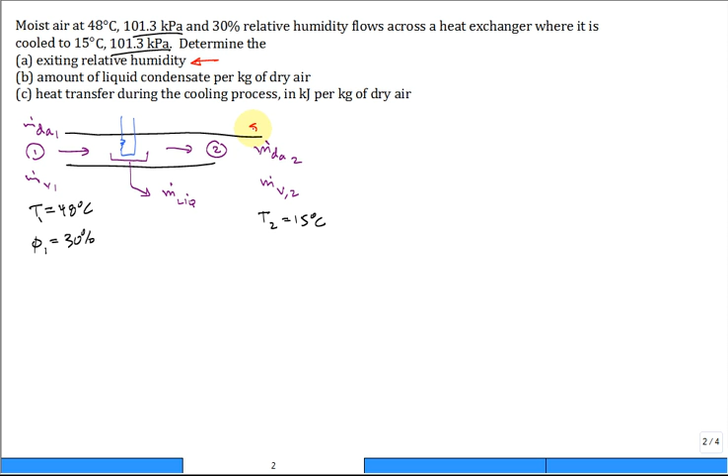So the first thing is if you get liquid condensation out, that means it's gotten to the dew point temperature and then below the dew point temperature. So you've taken some moisture out of the air, and so the answer to the first question you'll have to check, but it's probably coming out saturated air. And if it's saturated air, we expect that the relative humidity would be 100%. But we have to calculate that. We have to check it.

And so what we'll do is go ahead and write a balance. There's 3 balances, 2 mass balances. One is really trivial, it's for the dry air. The other one, a mass balance for the water. And then the other is an energy balance. So we do all of the balances for a control volume like this. So we have inlet 1, outlet 2, and possibly outlet of the mass flow for the liquid.

And then for heat transfer, for the energy balance, I'll go ahead and put it like this. Some Q dot, not in, but Q dot removed, because it's a cooling coil. It's taking heat out of that airstream.

So let's take a look at the first balance, for the dry air. It's really simple. The mass flow rate of dry air flowing in at 1 is equal to the mass flow rate of dry air flowing out at 2. Even though there's some water possibly condensing, the dry air flow rate's the same, and so we typically get rid of the subscripts and that's equal to a constant. It's just a constant.

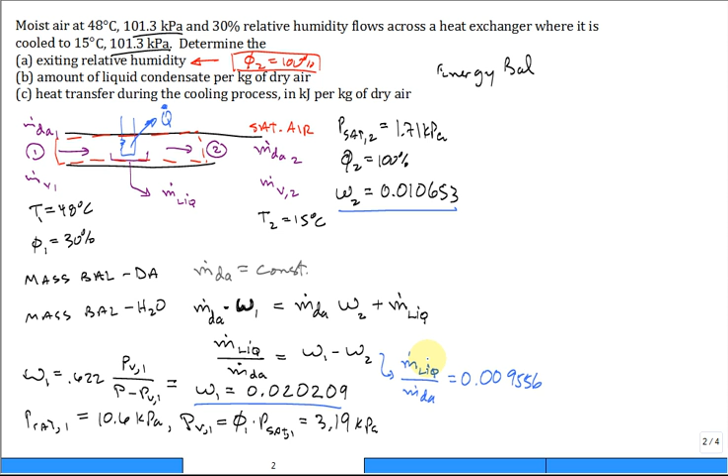So it's less, hence there was some condensate formed, and we can now calculate right down here that the mass flow rate of the liquid divided by the mass flow rate of the dry air is a difference between those two, and that's equal to 0.009556. So the exiting relative humidity we do confirm is 100% at saturated air, and the amount of liquid condensate per kilogram of dry air, the answer to part B is right here.

Now for part C, we need to do that energy balance. I don't know if I left enough room. Hopefully I did. We'll try and squeeze it in over here. And so for the energy balance, we have what's coming in with the mass flow, m dot of the dry air coming in times the enthalpy of the dry air coming in.

And then we have the mass flow rate of the vapor coming in times the enthalpy of the vapor, and I'm going to put H of G coming in for the enthalpy of the vapor coming in. So those two contributions, the dry air contribution and the vapor contribution of coming in with those two mass flow rates. Okay. Then we're going to have outs. Well, Q dot is an out, the way we've modeled it.

We also have mass flow rate of the liquid times some enthalpy of the liquid, and I'm going to put enthalpy as if it's saturated liquid, H of F, and it's going to go out at a temperature, and just like for our adiabatic saturation temperature, it goes out at the exit temperature T2. Okay, so if hot humid air comes in, cooler air goes out, the liquid goes out at the same cool air temperature going out. That makes sense.

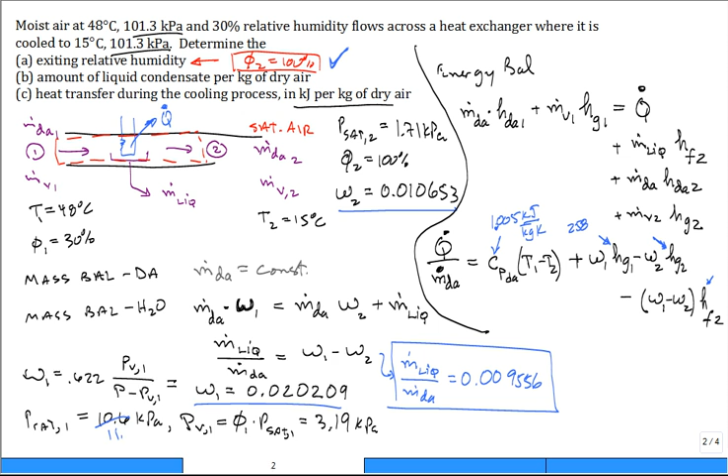And then you just multiply the relative humidity times the saturation pressure to get the actual vapor pressure. I like to always do it in 2 steps. Subtract to find the actual dry air partial pressure, and then compute the humidity ratio. So it's 0.0213, somewhere in there, 0.0213, okay?

And now, this is the enthalpy that's recommended to be used for the vapor coming in, H of G. And you can see how we look it up. It's the enthalpy, in this syntax, HV underscore T of water. So as a function of temperature, what is the saturated vapor's enthalpy?

You could also do it this way, and notice these two numbers are slightly different. Here, what are we doing? We're saying, give me the enthalpy as a function of pressure and temperature for water, and the pressure is the partial pressure, and the temperature is 48. So it does give you a slightly different answer, okay? But not much. It's good to 3 digits, but not the 4. But we'll use H of G, and that's what's recommended through the textbook.

Now, if you go out and say, okay, we're coming out at 15 degrees C at the outlet, and the pressure, humidity, we assume, and then we check, and it works out that it is saturated air. That's the saturation pressure. That's the actual vapor pressure. The partial pressure of dry air is much larger. The humidity ratio is much smaller. So you can see that this is a larger number, this is a smaller number. And you notice that there's much less difference.

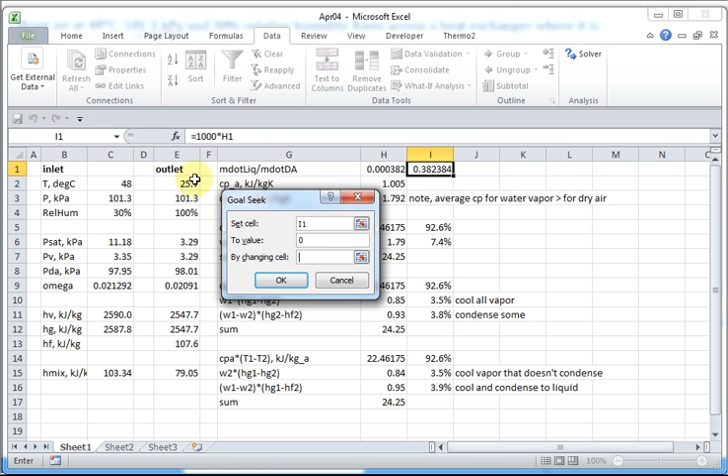0.1 is pretty small. By changing this number, 25.7, it won't change much, but let's see how much it changes. 25.9. So you really drove it to 0. So that's the dew point temperature, 25.9. And notice, there's no energy associated with condensing. It's almost all associated with cooling the dry air. 92.6% of the energy cooling is just to cool the dry air.

It's a lot cheaper to air condition buildings and homes in West Texas, where you don't have a lot of humidity issues, versus Houston, New Orleans, etc., where you have a lot of moisture. It takes a lot more energy to cool it. So there you go. Let's put this back to 15 degrees C.

There's one other thing I did in this Excel spreadsheet that I'll show you. You can get a number for the enthalpy of the mixture. This equation right here is just saying I'll take a specific heat, multiply it by the temperature, and that's a measure of the enthalpy of the dry air. And then we'll add to it the humidity ratio, omega, times the enthalpy of the vapor. And now I have an enthalpy of the mixture. By itself, it's not good, but if I get another enthalpy of the mixture, this one, similarly calculated, whoops.

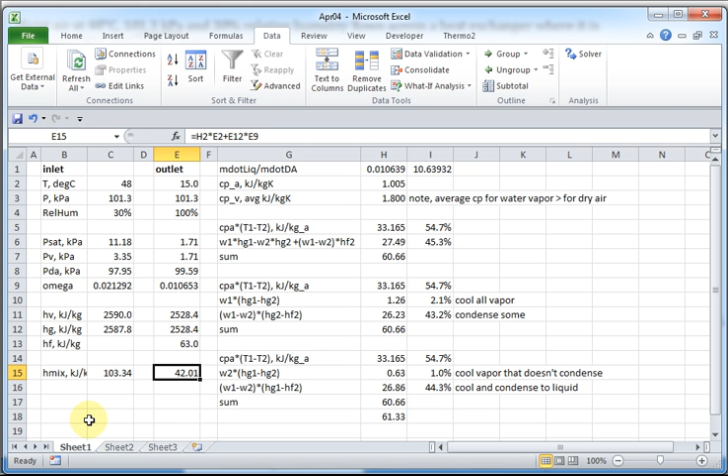So if we go back, we can wrap up that problem. What is it? You know what? I'm not going to wrap it up because I see that all my numbers were thrown off. Okay, so you'll have to just compare, fix it.

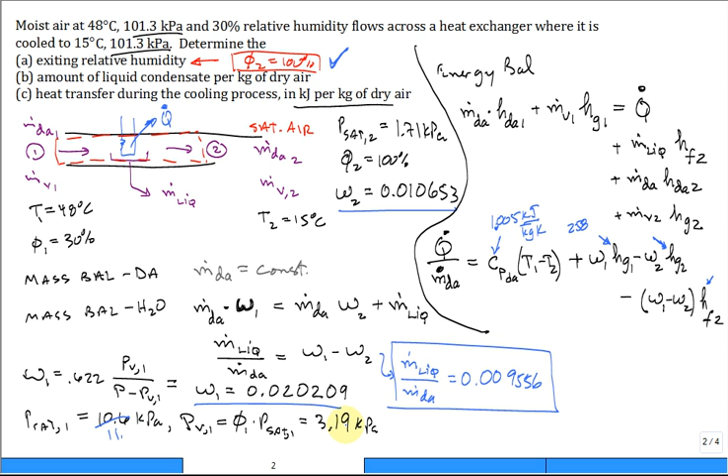But let's move now to what is the psychrometric chart. I often don't want to introduce the psychrometric chart to students too early, because then they just want to use the chart to solve all the problems. This chart has a lot of information. First of all, remember that we have knowledge of two humidities. We have relative humidity and humidity ratio.

This one gets more talk out in the literature, out in the newscast, etc. And probably you're more familiar with it coming into this class. But the engineers really like humidity ratio. We do a lot of calculations based on humidity ratio. And then we have some temperatures. We have the dry bulb temperature, the wet bulb temperature, the dew point temperature. So 2 humidities, 3 temperatures.

That's a lot of information already to try and put on one plot. But then we also have, and we didn't talk about it too much, the specific volume. This would be how many meters cubed per kilogram of dry air. If you're trying to size a duct, you'll need to know how many CFM, or cubic feet per minute, or how many cubic meters per minute of flow go through it. So it's a volumetric type of calculation. So often we need that specific volume as well.

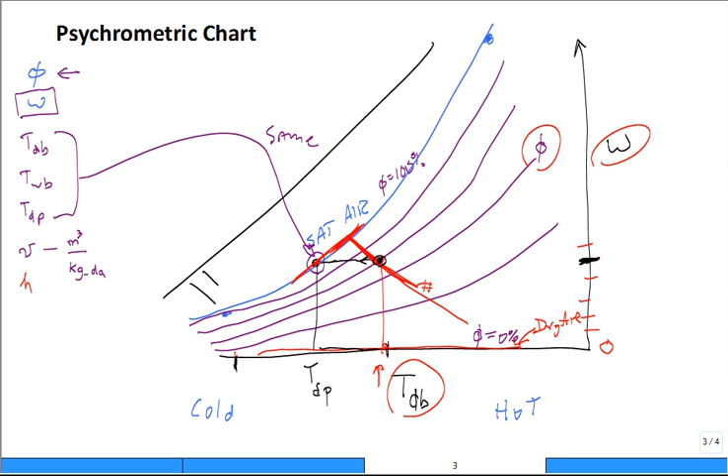Now up in here, I forgot to mention also, there's enthalpy of the mixture. Enthalpy of the mixture is like this, and they project down the lines, and for this class they are essentially the same slope as the wet bulb. They're coincident. Now they're slightly off in a good psychrometric chart, but we only have one or two days of the psychrometric chart and we're done. So these are lines of constant enthalpy. That's the mixture enthalpy: C sub P times the temperature plus omega times h of g. And that's the lines that are on the chart.

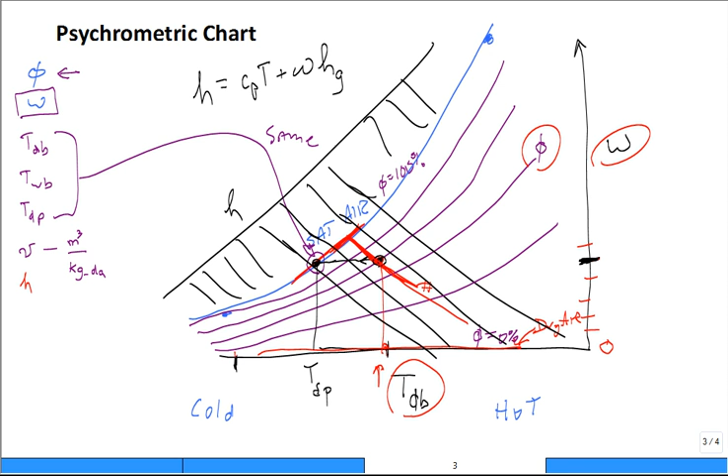So here you can get one of those charts right here. Let me not take off the top one because I got something written on it. There you go. And this is now the chart. It's a little overwhelming, but hopefully we broke it down. What's on the x-axis? It's the dry bulb temperature, in degrees C. What's on the y-axis? Don't look to the left, look to the right, and it's humidity ratio in kilograms of water per kilogram of dry air. And then find that line of 100% relative humidity for saturated air. It goes just like that, coming all the way down.

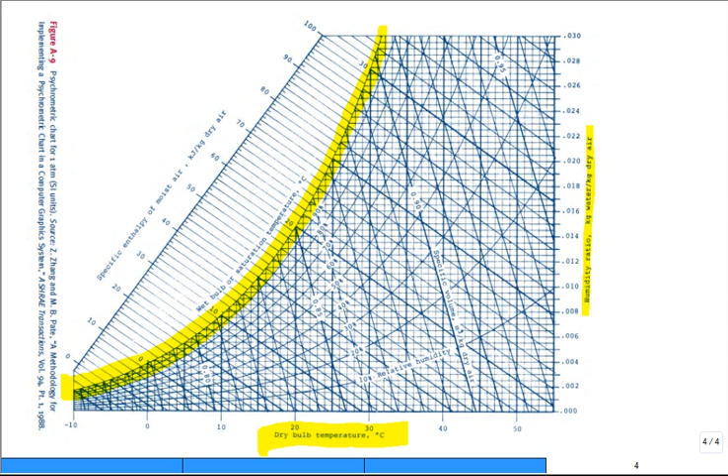And then find lines of other constant relative humidity. Maybe you pick one that is 50%. Here's a 50% relative humidity line, and it goes like that. Notice cold air cannot hold a lot of moisture. Warm air, hot air can hold a ton. So a 5-degree increase in temperature from here to here really greatly increases how much moisture the air can hold, how much omega can go up.

And then the lines of constant enthalpy, here's their specific enthalpy, so 40, 50, 60, and they get you the slope going and you project it off and down. So if you use it, you have to use a ruler. Straight edge, that's right. And then also they put these lines in here. Let's look at this one that hits at 20. This line right here is not a line of constant enthalpy, although it's the same slope. It's a line of constant wet bulb temperature, which is 20 degrees wet bulb.

So this line right here takes you a while to figure out what that is, because it's nice and thick, and this line is nice and thick. This one, oh, it's 10 degrees wet bulb. This one's 20 degrees wet bulb. This one was 15 degrees wet bulb. And then you can see, that's 11, this one's 10, 12, 13, 14, 15. And so you get used to reading it, the lines of constant wet bulb.

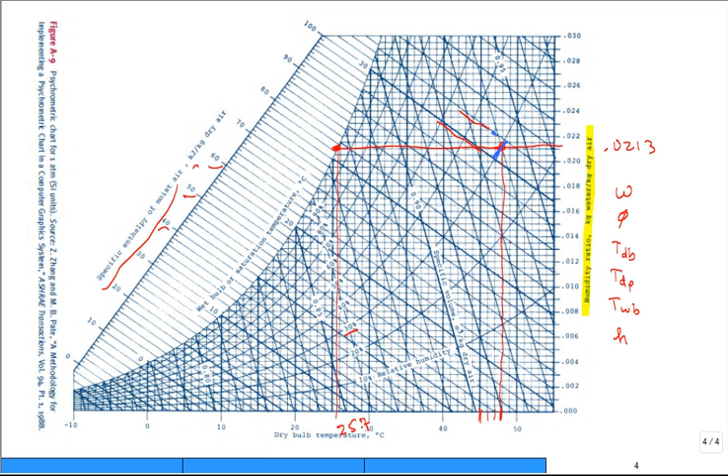So for each state, we should be able to get the omega, the phi, the temperature dry bulb, the temperature dew point, the temperature wet bulb, and you can also get enthalpy of the mixture. Okay, so the wet bulb is right between where the omega and the dry bulb temperature meets. Yeah, it looks like you have to interpolate this way between this line and that line. Okay. This line's 30, that line's 31, and it looks like it's around 30.8. So for the wet bulb, 30.8.

And now the other one, if you want, you can extrapolate this back and pick off a mixture enthalpy. And I would say it's around 104. The mixture enthalpy is maybe 103, 104 kilojoules per kilogram. Let's jump back to the Excel code to see what it came in at. 103 point something. So you can confirm these numbers. Let me jump back to the psychrometric chart.

Okay. Now, what happened was you started to cool it. And when it first came across the coil, it cooled a little bit, cooled a little bit, until, as it's flowing deeper across the coil, it finally reached a temperature about 25.7, and it still wanted to be cooled all the way to 15. It starts dewing out now, till you get to, here's 15 degrees. And this is 100% relative humidity. That's saturated, true? So it goes all the way to this point. So that's the path.

Like that. And at that point, the three temperatures are trivial, aren't they? Yeah, they're all the same. But you could read across and get omega. And so it looks like omega is around 0.0105. And let's jump back to the Excel and take a look. Omega 0.0106. Yeah, it's pretty good. And so we'll jump back over here.

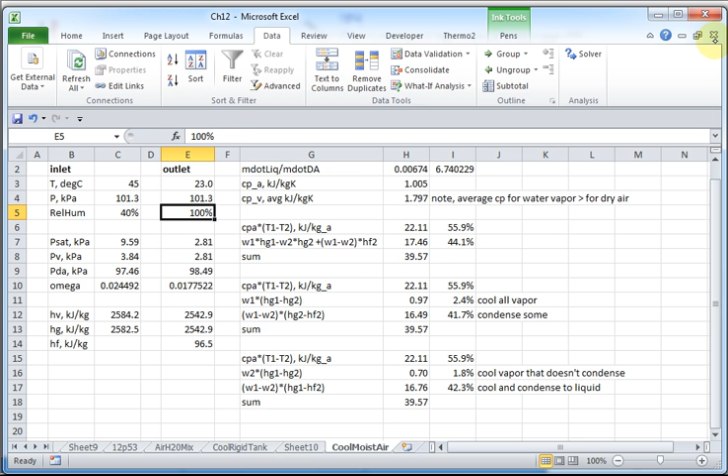And then also, you should be able to read off the enthalpy. What's the mixture enthalpy look like? Oh, I'd say around 42. 42. And if we jump back to the Excel code and take a look, its mixture enthalpy... whoops, I went to the wrong Excel code. I should close this other file. It's 42.01. In the ballpark. Or even do the calculations in the first place.

Once you get good at the chart, people don't want to let go of it. It's like, hey, this is so easy. All those tedious calculations. Oh, yeah. So students really love it. You have to pull them off and say, no, no, no. Do not use the psychrometric chart for this problem.

Now, the way that instructors can easily do that is they'll say something like, this chart right here is good at what pressure? Atmospheric pressure. They change the pressure to make up some ridiculous pressure. Oh, it's 0.8 atm. That shifts everything. The chart, if you use it as 1 atm, will be close, but it won't be exact. So there's the rub. That's how an instructor like myself would force a student to say, hey, no, you can't use the chart. That's only good for 1 atm.

Yeah. Okay, so the enthalpies look great. And if you wanted to, the specific volumes are right here. This line, you see how they're sloped? They're sloped that way, and they're very steep. So the specific volume here is 0.85, and then this is 0.90. And you just have to read the specific volume if you wanted to. I didn't use it, so.

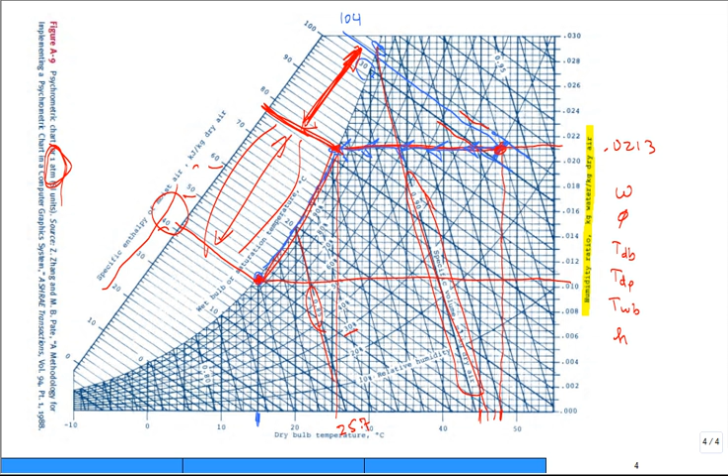So, if you wanted a real good breakdown, you could look at the code. And that's what we did here. We're looking at 55% just to cool the air. And the rest, 45%, is due to condensing and cooling the water vapor.